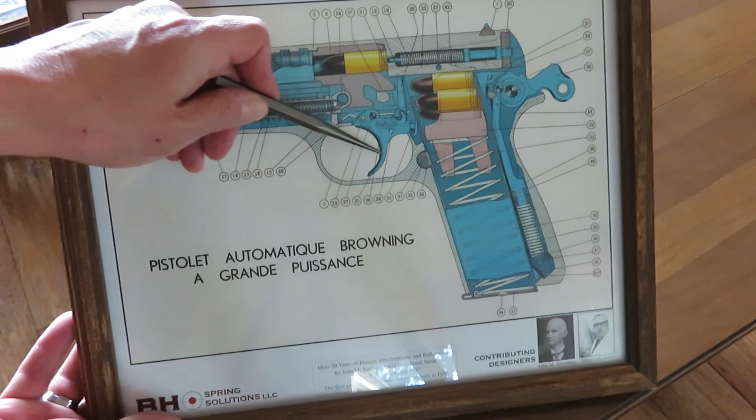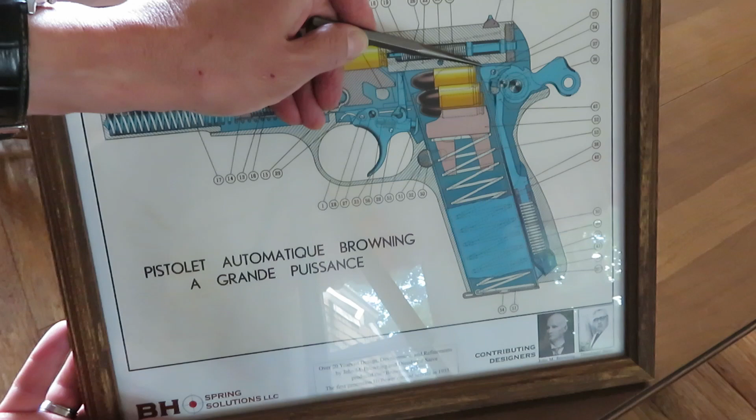The Hi Power's trigger is, when the trigger is pulled, the trigger lever rises and it contacts the Sear lever. You see it outlined here in the slide. So it presses up on this end of the Sear lever, which is leveraging down on this end of the Sear lever, which needs to contact this Sear, and presses down on this Sear.

By the way, this Sear has the resistance of a long Sear spring, kind of a leaf spring sort of spring, not a coil spring, but a flat metal spring that sits behind this Sear, which discourages this Sear lever from pressing down on this end of the Sear.

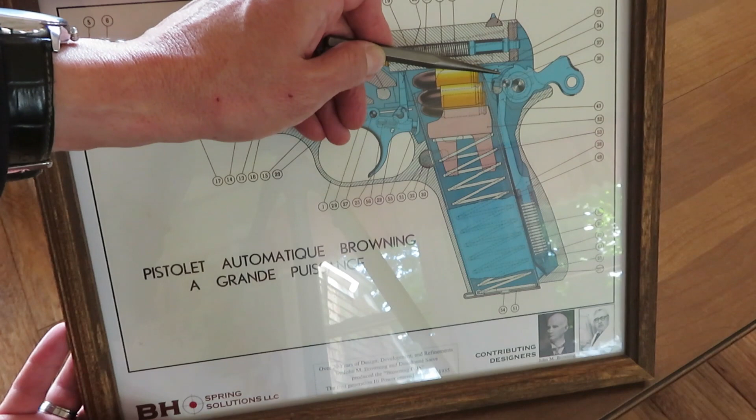The Sear lives on a pin, and it needs to be as fluid of a fit with that pin as possible. But on this end of the Sear, you have a hammer tooth that is pressing against the Sear, further wanting to keep this Sear in place.

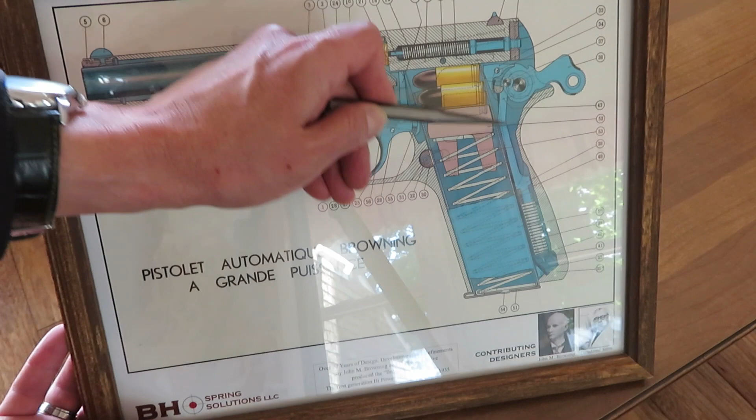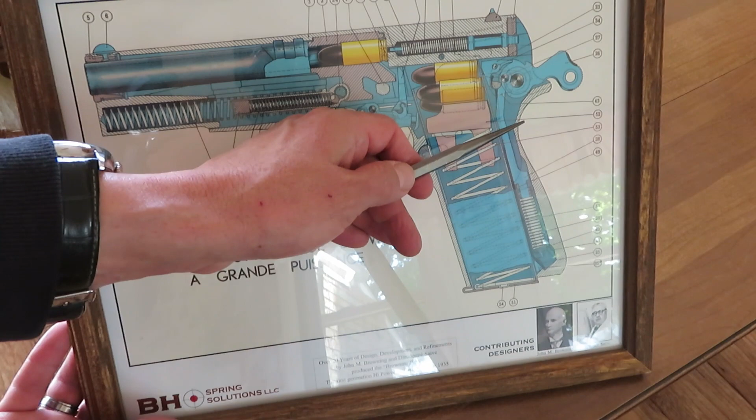And that pressure from the hammer is being influenced by an OEM 30 or 32 pound mainspring. So you've got, and that 30 or 32 pounds is 30 or 32 pounds of push when the spring is at this compressed dimension with the hammer cocked. So we have 32 pounds of pressure pressing against this Sear.

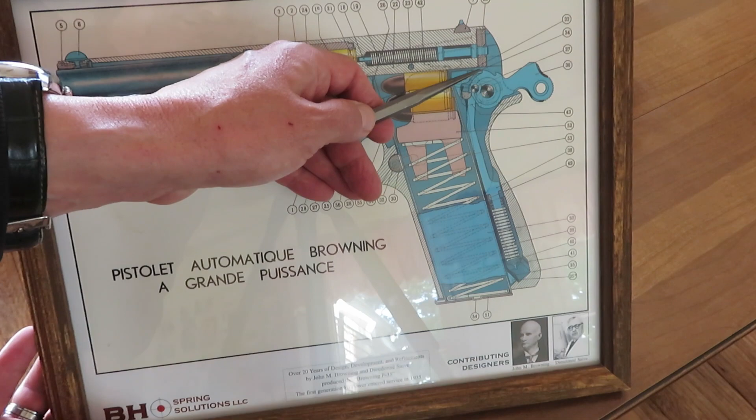We have another spring over here that wants this Sear to be kept pushed this way, which in effect keeps the Sear pressed down in this position as well. So this is kind of a round robin arrangement that we have with the whole Hi Power's trigger mechanism in the fire control group, and how it works.

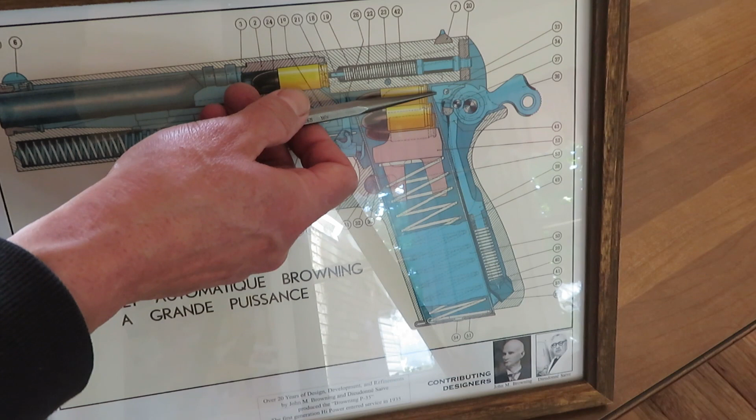Once the Sear lever has sufficiently pressed down on the Sear, causing this end of the Sear to rise up past the edge of this hammer tooth, the hammer is then free to come home to the firing pin, igniting the cartridge, and we have ignition.

So we're going to be talking about this, but I wanted to show you this, and the reason why it's very difficult to talk about a trigger, if we're going to talk about a trigger past the point that involves pulling the trigger and the trigger resetting, and those kinds of things.

This is a 1911. John Browning designed it. John Browning knew what the trigger finger liked, and this was John Browning's design and interpretation for a full-size handgun and what the trigger should be.

And the take-up is about that much travel. The break is about that much more travel. And then at the point the slide comes rearward, we have just a little bit more trigger travel, we would call over travel, not much, but it's there. And then the reset happens just like that.

Absolutely incredible. And this is an out of the box, that trigger mechanism's really not been modified by much other than the SFS Sear, the SFS hammer. But that was John Browning's interpretation of a trigger.

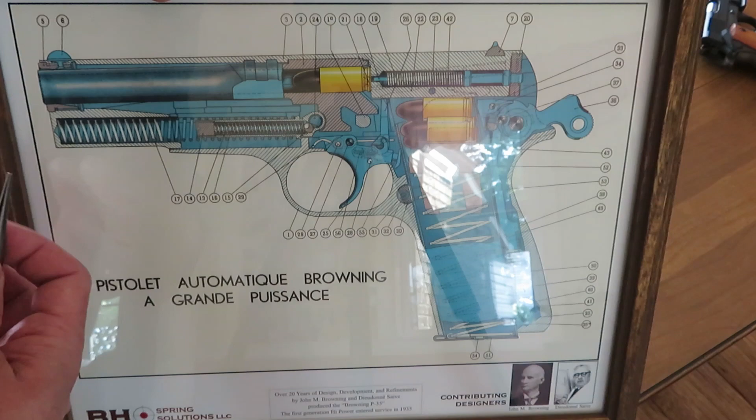In fact, there are some differences in the 1911. John Browning's approaches were very, very straightforward, very kind of linear. The extractor went in the back of the slide and it came out on a straight line in the front of the slide.

In the high power, it starts out up in this part of the slide, about the 1:30, 2 o'clock position, and then it goes in and it goes at a slope.

John Browning's design work was very linear, very direct. In fact, on the 1911, it is just a very direct trigger action back to the part that activates the sear and hammer tooth so the weapon will fire. Nothing complicated about it, and it was a hallmark of his design.

In the High Power, when it first began being designed, John Browning was having to do workarounds all around his own patents that he had sold to the United States government for the 1911. So he was having to invent even a better mousetrap than he had invented before. What changes with the High Power are the steps of things and where this whole chain of events goes, and the fact that it goes into the slide at all is very different from the 1911.

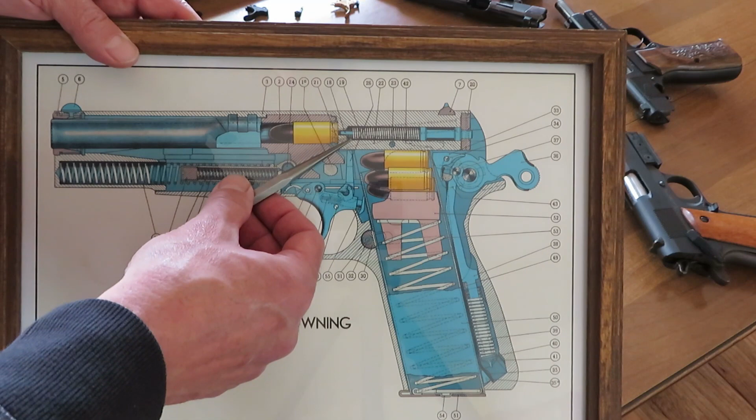So we pull the trigger. The magazine is in, the trigger lever is positioned, it presses up against this sear. The sear presses down against the resistance of both the mainspring and the sear spring, lifts the engagement area of the sear with the hammer tooth upwards. Hammer flies forward. We have ignition.

Now the slide begins to recoil. And when the slide begins to recoil, that means the sear lever and the whole slide begins moving rearward. The trigger lever doesn't go anywhere. So when the slide starts rearward, this is when we will sense or feel in the trigger what we would call over travel at that point.

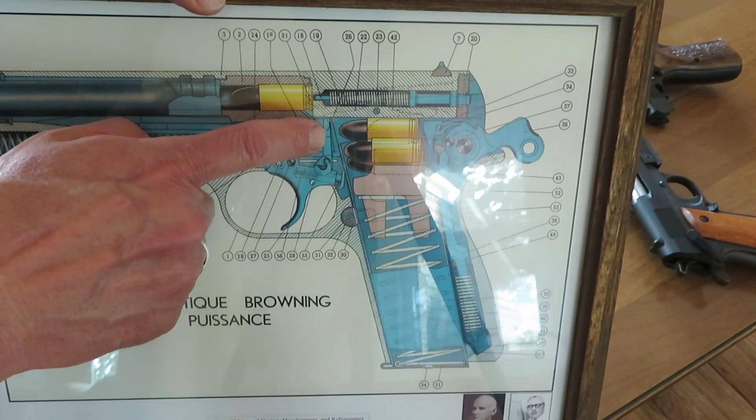In other words, we'll use this Arcus here as an example. I have my take up, break there, and then when the slide starts rearward, watch my finger. Do you see my trigger finger move a little bit further rearward? That was the sear lever coming rearward, and now the trigger lever has nothing keeping it from coming up further.

Into the slide, and it will until the front part of the trigger, or this part right here - this is your trigger front stop. So now the trigger can over travel until it's reached the front stop, and this front stop lives in what we call the trigger well area of the frame.

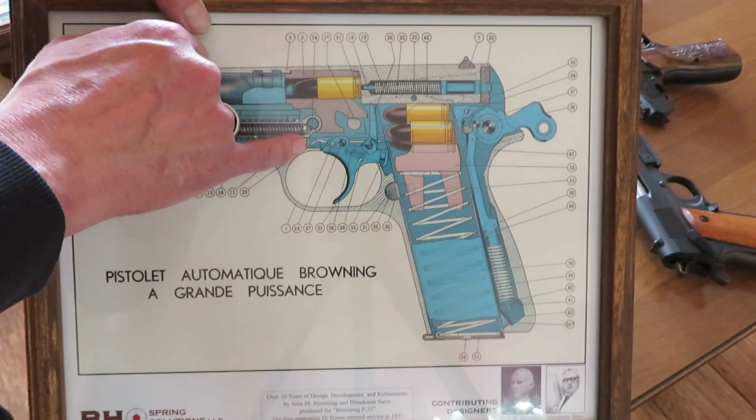So when the trigger is pulled rearward, this front stop, which shows on our schematic right there, when it's pulled and reaches the bottom of this trigger well area, that's where the front of your trigger return spring lives. You can then no longer pull the trigger any further rearward, and then the forward motion of the trigger travel we call reset.

Now, for our purposes, we're going to talk about this in just a little bit of a different way. I'm going to go back to our Arcus real quickly. And what I want to point out to you is this: take up, break, over travel. I sensed my finger move just a little bit rearward, not much.

Now, when I come back forward with the trigger, I want you to listen. Right there, that click - that is reset. Everything before that, that motion that you saw, is forward movement of the trigger. This is not reset. What you just heard right there is, for our discussion, that is reset - when you hear the trigger lever spring back rearward.

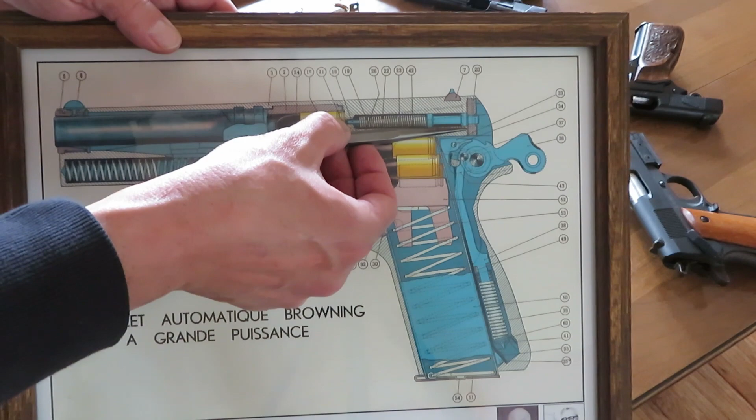Because what has happened - and this is a very, very important thing to understand, and you're going to understand why here in just a few more minutes or a couple more sessions - envision this: when this trigger lever pushes up on the sear lever, presses down the sear, the sear comes up, causing the hammer to come forward. At that point we have had whatever over travel there is, because the sear lever moves rearward and is no longer above the trigger lever.

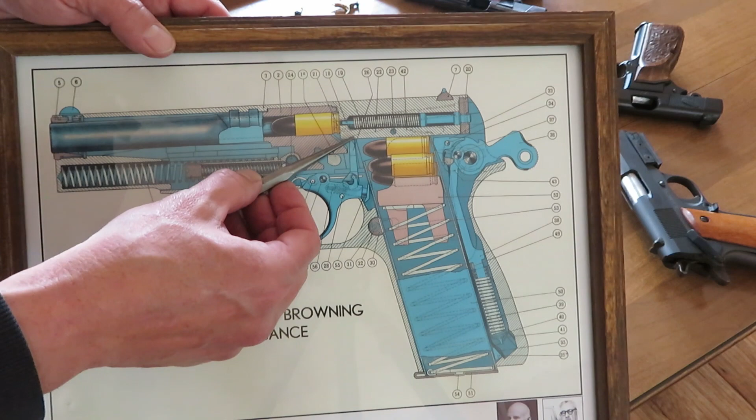At that point, this slide cycles faster than the trigger finger is probably going to let go of the trigger. Now envision this trigger lever up and this sear lever coming back forward. That sear lever must engage the trigger lever right here, and then press that trigger lever forward in the channel, and the slide will come all the way forward, and that's where that trigger lever stays.

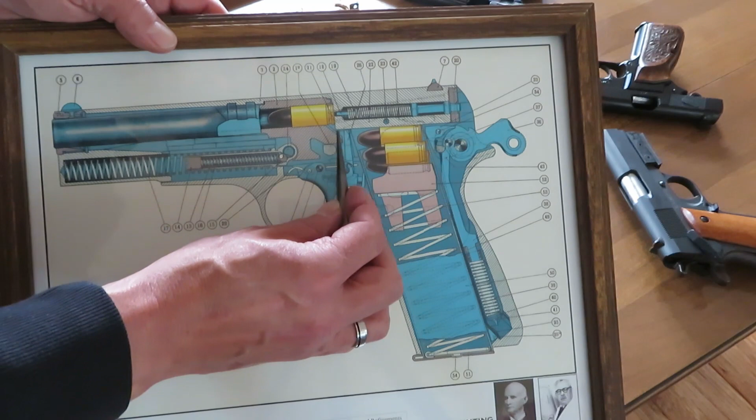When you've pulled the trigger and you still have that trigger pulled all the way, that trigger lever is now approximately right there. When you release the trigger lever, now the trigger lever, which is this part, is engaged with this front face of this sear lever. Your trigger lever starts to come down as you allow the trigger to come forward, and as it comes down under the sear lever, that reset click you heard was this trigger lever snapping back in the channel. That is how they reset.

In terms of talking about how do I have the least amount of take up, how do I have the least amount of reset, how do I have the shortest possible take up, break, reset combination. Understanding that the reason we're asking these questions is basically this handgun and what we've come to expect from a John Browning trigger. After all, this is usually called the Browning High Power, so it's kind of what we have come to expect. It's become a favorite subject because it's one of those areas that there was room left for improvement in this original design, and that's a lot of what we're going to be talking about.

A couple of other things I want to point out here on the schematic for our session today.

Many people say that if I take out this magazine disconnect, this is going to clean up the take-up, and it's not going to reduce the trigger break. This is actually false. In our experience, you do reduce the trigger break a little bit, usually around a half a pound to three-quarters of a pound, roughly, by removal of the magazine disconnect device.

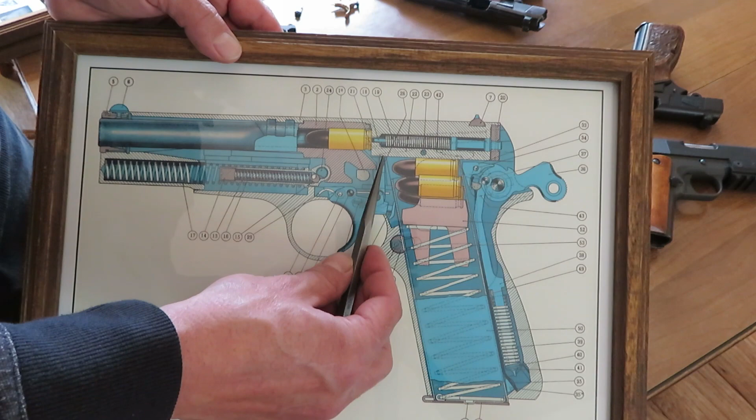So when you're back through the take-up and you are at the point of the trigger break of the sear disconnecting here from the hammer tooth, or clearing the hammer tooth, at that point you're also pulling against the most robust energy that you're going to have out of this magazine disconnect. That's a little bit heightened because this angle that we're pulling against is an opposing angle. It doesn't really want to do what we're asking it to do. So all of this together, yes, it does create more of a trigger break, a higher trigger break, because of everything that's going on at that moment of the actual break.

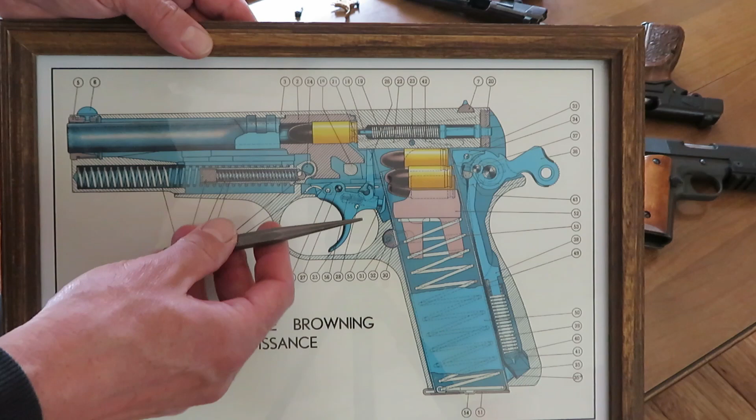Now, another aspect that's seldom talked about is that this magazine disconnect, this very same device that is resisting the trigger being pulled rearward, also encourages the trigger to reset forward. So it's not uncommon to hear guys that have said, well, man, I removed my magazine disconnect and I have this so much cleaner take up and the break is lighter and the world is wonderful, except the reset is kind of anemic. And you may find that actually. The reason is because you've taken out a factor in the whole reset equation, which is partially the reason that this trigger comes forward, because of that magazine disconnect device.

We'll be back in touch with this whole device and what it's all about and how to optimize it in another session. But this is what's going on, this is what's happening.

Want to focus in on, first of all, the trigger lever lives approximately here in the frame. The sear lever lives in the slide. There is always going to be a certain amount of distance between this trigger lever, where it lives, and this sear lever, which is up in the slide where it lives. There is always going to be a distance between these two that must be bridged by range of the trigger. In other words, take up.

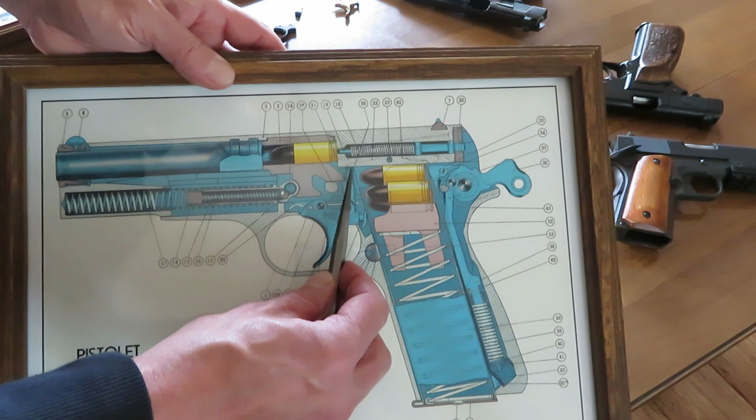It must make a minimum height, or the front of this Sear lever, when the slide is coming back forward, will not catch this front edge, or the front edge of the top of the Sear lever will slip underneath. In this case, the Sear lever floats, which makes this sort of a moving target. So the trigger lever must come up far enough for the front edge of this Sear lever, when the slide comes back forward, to move this trigger lever forward and keep it forward until the trigger has been released, which means the trigger lever comes down and can move rearward in its slot and has reset.

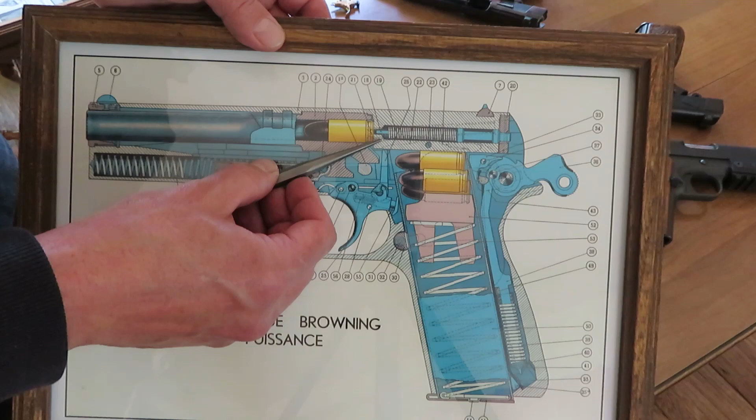The implication of not enough trigger height and not enough trigger travel is that when the slide comes back forward, this trigger lever can slip under the Sear lever, activate it again while the trigger is pulled, firing off another round without actually pulling the trigger more than once. That's a scenario that must be avoided in all high power pistols.

So what we're showing you here is that a minimum amount of trigger travel activates the Sear lever and positions the trigger lever, when the trigger is pulled, high enough so that this Sear lever reliably engages the trigger lever here when it's up, and pushes it forward. This is necessary for the design. The design does not function without a minimum amount of trigger travel. And duplicating the 1911's trigger travel is impossible because of the way this design works.

However, it is very well possible to optimize this design to make certain things in certain triggers on high powers better. We call this trigger tuning, and we're going to be getting into that in our next session. But we wanted to build this foundational basics about what these parts are, where they are, how they work, how they integrate together.

Next time, we're going to be talking about this Type 1 Sear lever. That Type 1 Sear lever looks like this. That's the original Sear lever. That's what depresses down on the Sear. This is the Type 2 Sear lever. This is the one that is a drop safety design.